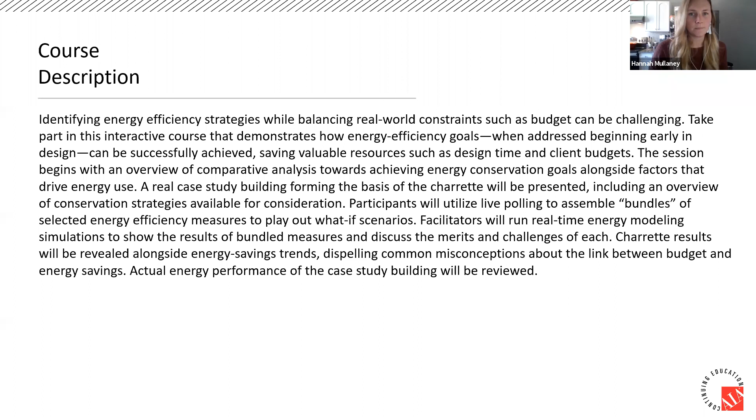So in this course, just to outline some of our learning objectives, we're hoping that you'll be able to recognize the value of early energy analysis in the design process, and help you identify a range of energy efficiency options and their impacts on energy outcomes. Also interpreting building performance and financial information provided by the energy analysis results. And we also hope that you understand how decisions made early in design can increase your energy savings opportunities.

So just to outline the agenda and what to expect: we'll set the stage for the charrette that we'll be interacting with later. This is a live participation charrette. Then we'll discuss the results of that charrette and evaluate the energy model and look at the trend data. And then we'll review the built project, the actual project that was built based off the charrette that we are using today.

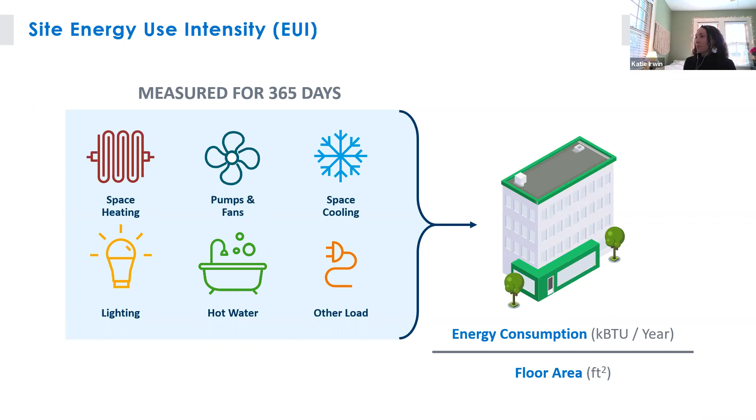Okay, so how does EUI work? Well, as you can see here, we take all energy needs in a project such as the heating, the cooling, the lighting, basically anything that's going to make your meter spin. And we divide that energy consumption by the square footage of the building. And by doing so, this normalizes the value independent of the size of a project. So we can compare the efficiency of a smaller building to that of a larger building on a per square foot basis. And that resulting number will give you the EUI.

Well, looking here, we have the site EUI and source EUI. So you might be familiar with the difference between the two. The site EUI looks specifically at on-site energy consumption, whereas the source EUI also takes into account the inefficiencies in generation and transmission. But for today, we're going to keep it simple, and we're just going to look on the on-site EUI.

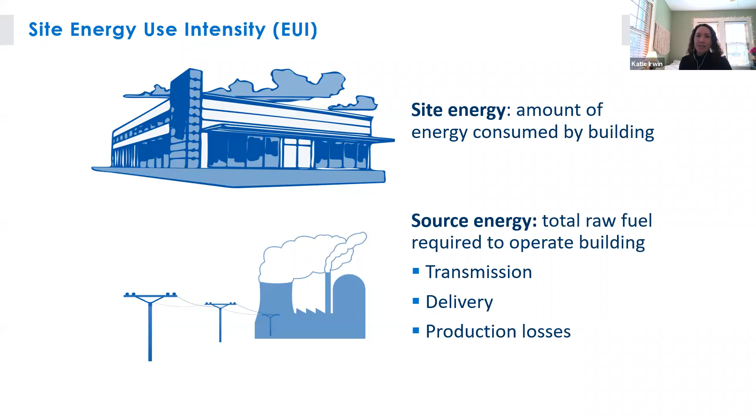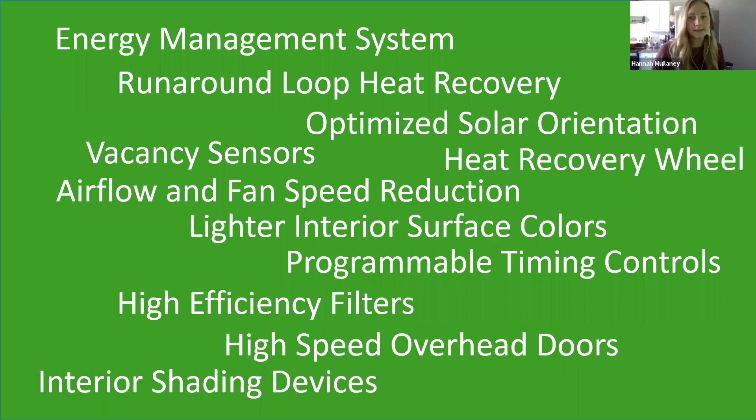So where do we start with our energy efficiency strategies? So far, we've talked about energy in the big picture on the grid and at the site. Now let's move into building and talking about efficiency. As an example, here are a few strategies you might consider. And here are some more, and some more, and more. And pretty soon you're overwhelmed and you don't know where to start. So how can you cut through it all?

Well, we recommend setting your goal for your project first. Are you trying to reduce your cost for your client? Or maybe you have a LEED goal or trying to get to net zero energy. Each one of these goals can send you down a very different path with your design. And the first step is to know what you are setting out to do.

So once you're there, how do you choose strategies? I can tell from experience and practice that often teams will depend on rules of thumb or maybe rely on manufacturer's literature. Maybe we compare to similar buildings, or you can guess where this is going. We can leverage energy models to do the work for us.

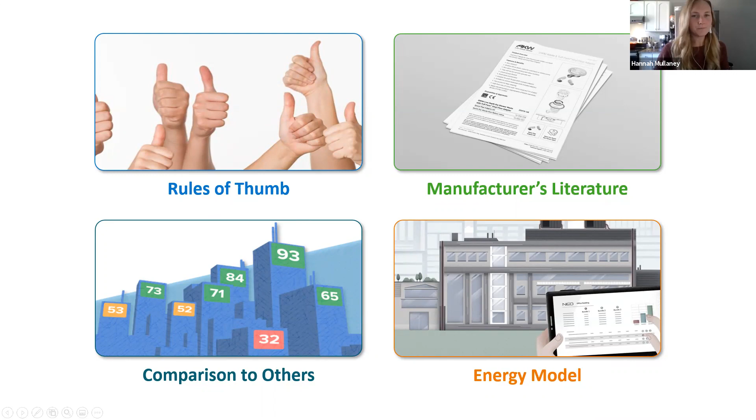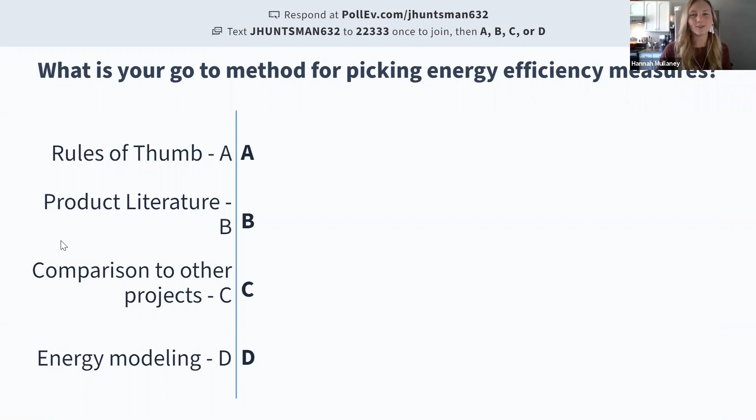Sorry, I forgot to clear out previous responses, but this next question: so what is your go-to method for picking energy efficiency measures? Don't let us bias you.

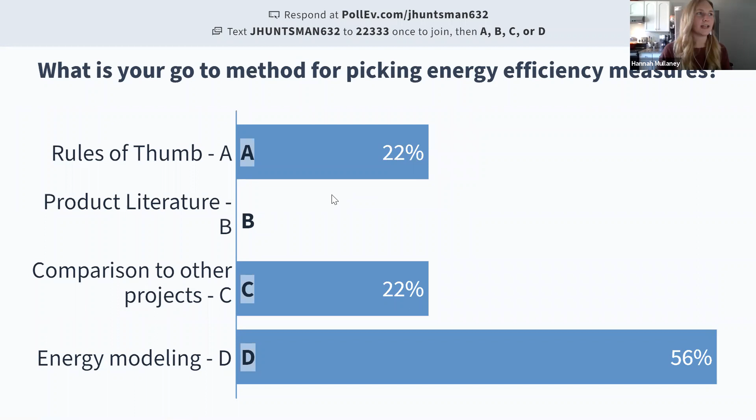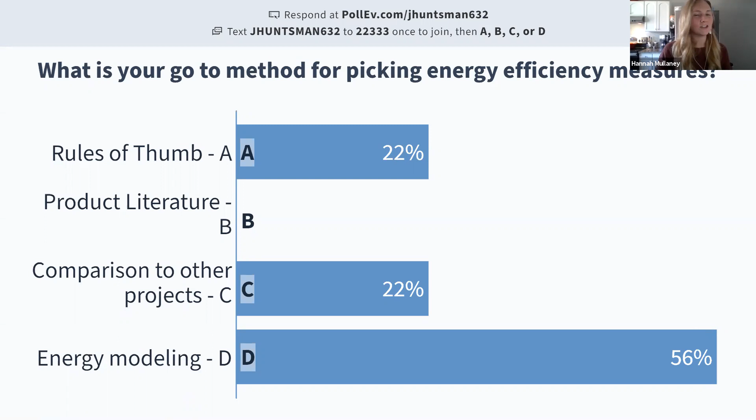Great. Yeah, so we see a lot of different strategies out there and not necessarily picking on any of them, but we definitely lean towards more of that energy modeling strategy, just so you can get that whole building energy analysis.

And Katie, back to you. Great, thank you. And thanks everyone.

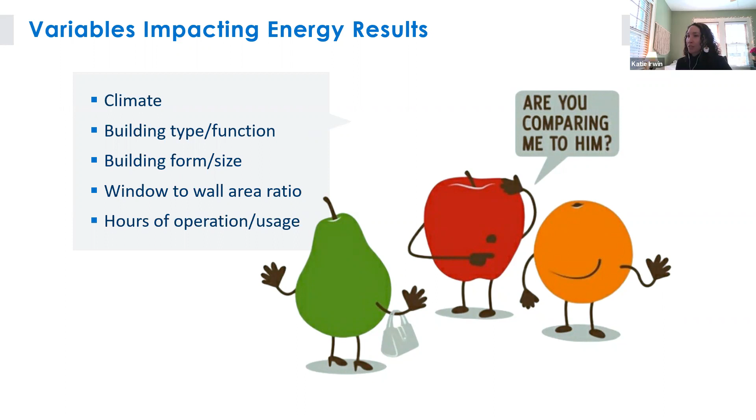And as we evaluate your energy model, what we're looking at are those optimal groups of strategies that will give you an idea of the potential for your project. So unless cost is no object, you're probably not trying to get the most efficient building out there. We understand that you're trying to align those first costs, the energy cost savings, along with your design goals.

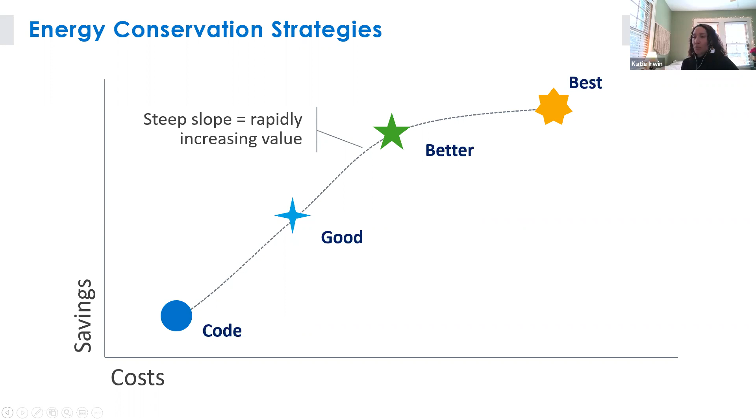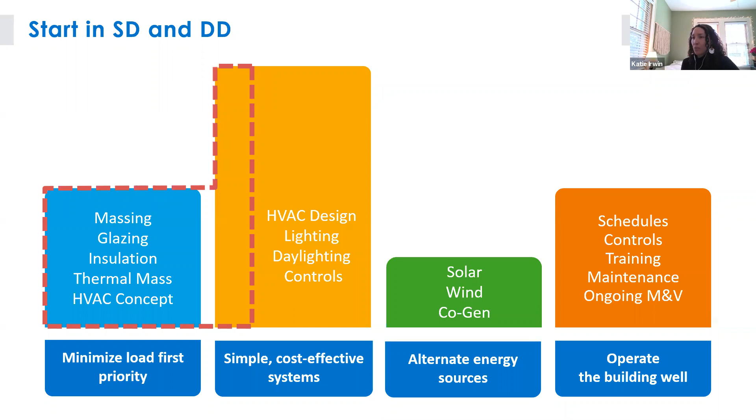And so by starting early, you'll have the greatest opportunity to maximize your savings when you're starting in schematic design and design development. First, by minimizing the energy load through efficient massing, judicious use of glazing, followed by implementing simple cost-effective systems such as the HVAC design, the lighting, daylighting controls. So applying these measures will minimize your base load and will have less impact to the grid. And of course, it's important to remember that at the end of the day, people will operate the building in ways we can't always predict.

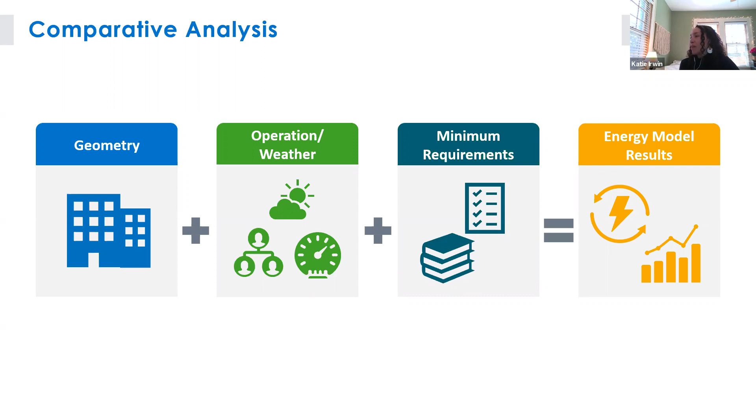But with everything that goes into these models, it's important to remember that combining the effects of energy efficiency strategies isn't additive. It's not straight addition. So 2 + 2 doesn't always equal 4. It sometimes equals 3.25 or 3.1. And that's because we have a whole building and systems approach. We're taking into account how these strategies interact with each other.

So let's get back to that long list of energy efficiency measures. With some energy modeling tools, it's possible to study every one of them, but in the interest of time today, we're just going to narrow the list down to 6 categories and see which might be the best for a sample project. So we're going to be looking at building massing, envelope upgrades, lighting controls, HVAC systems, demand controls, and energy recovery.

A little bit about the project that we will be discussing today and using for this exercise. This is based on an actual project that came through our office. It's an elementary school with typical programming, typical uses, and typical hours of operation. The project is located in the heart of the Midwest in a climate zone 5A.

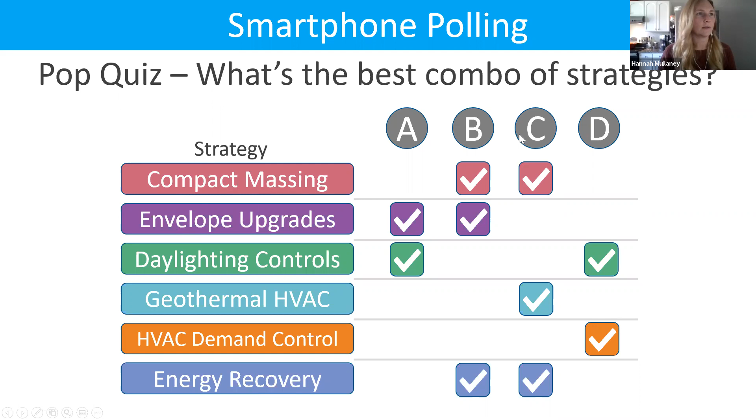All right, so now we're gonna jump into a little bit more detail, and we'll ask you the same question again with a little bit more knowledge, so you can reevaluate your answer if you want to, or stick with the same one. So think back to those 6 energy efficiency conservation measures we talked about a few minutes ago. Right now, we're going to go through each one of those strategies, review the options you'll have on the table, and we'll talk about some of the energy data you'll use to inform your decisions. Then we'll let you discuss and select which option you'd like to use in each category.

So the first option on the table is the building massing. On the left is the dispersed form. It's a floor plan that's focused on views, daylight access, and visual interest. The alternate on the right is the more compact form. And the user experience aside, moving in this direction could have some potential for energy savings.

And so when we move through this charrette, you'll see that there are dollar signs at the bottom. We'll give you a budget of $12. And so these correlate with the different strategies that you select. So in this case, for the building massing, the compact form is the less expensive, and the dispersed form is more expensive.

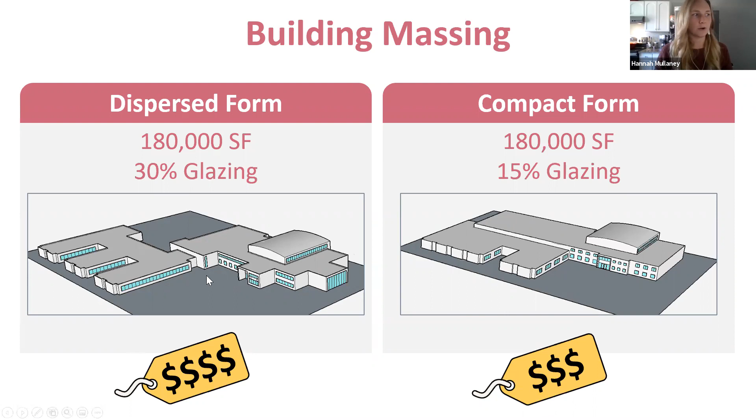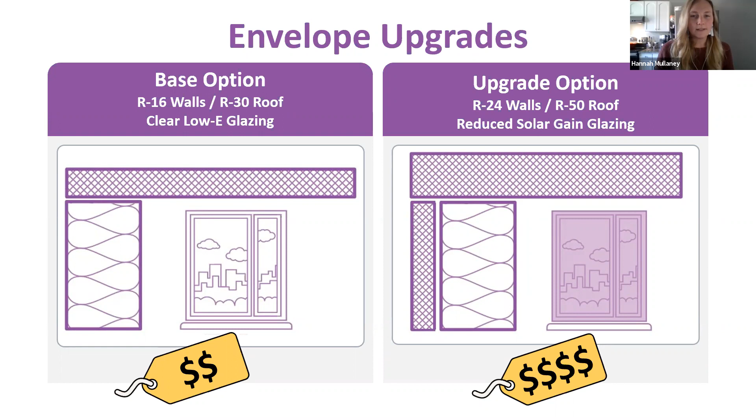Another decision we'll be looking at is the makeup of the envelope. We are using fairly basic insulation and glass on the left, or we're upgrading on the right. And so again, you can see that the upgraded option correlates with a higher price tag. And then for the lighting controls, you can choose to have the occupancy sensor or vacancy sensor control, or you can go with the daylighting controls.

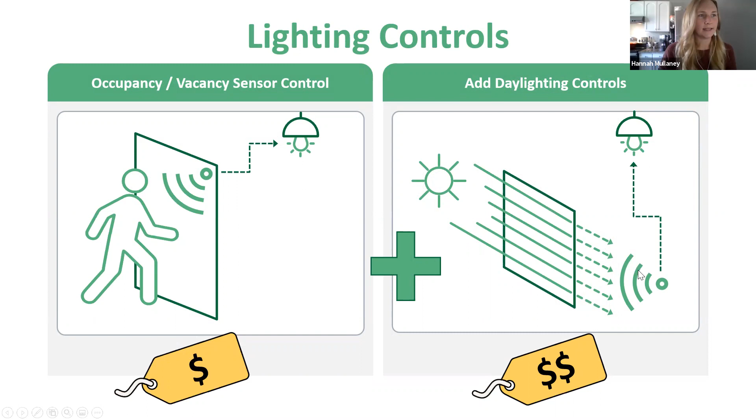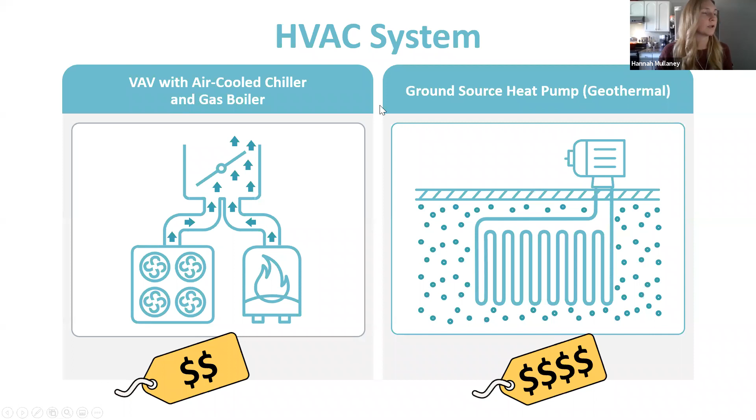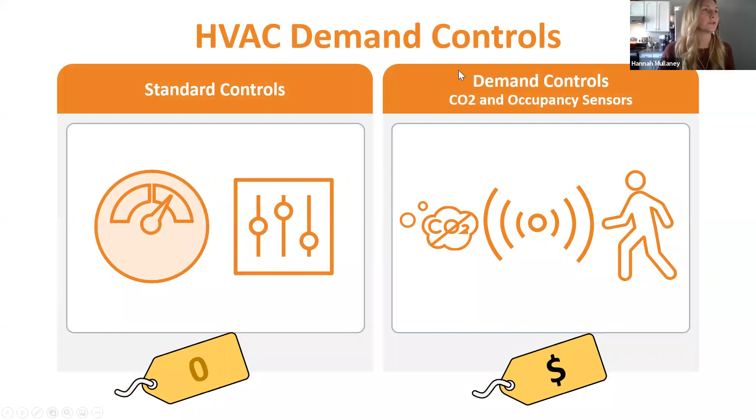And then with the HVAC, you can go with VAV with air-cooled chiller and gas boiler, or you can go with the geothermal option. And for the HVAC demand controls, you can go with standard controls or demand controls with CO2 and occupancy sensors. And last but not least is energy recovery. So you can go with no heat recovery or total heat recovery.

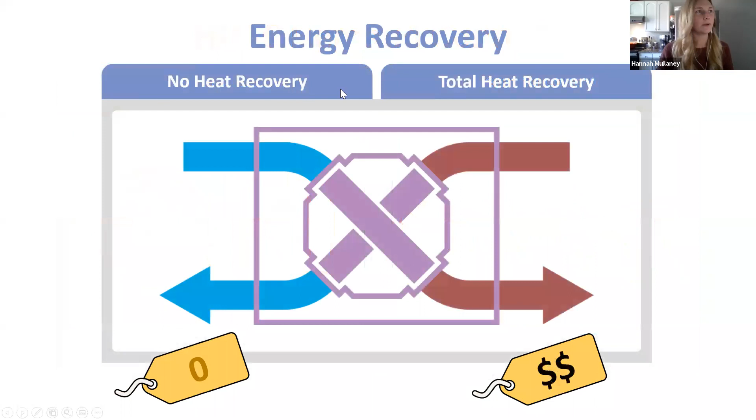So now, given the savings range and a little bit more breakdown of those different strategies, you can go ahead and pick your selection again, A, B, C, or D. I'll give you guys a second on this slide to look at it.

All right, great. So we will go over these strategies and pick the best. So B and C were our top two choices. So we'll start with B since that had the highest amount of votes. And Katie, would you mind letting me know which ones from B we should select? Yeah, sure. So for B, we had the compact massing, the envelope upgrade, basic daylighting. They went the VAV, basic demand controls, and energy recovery was selected.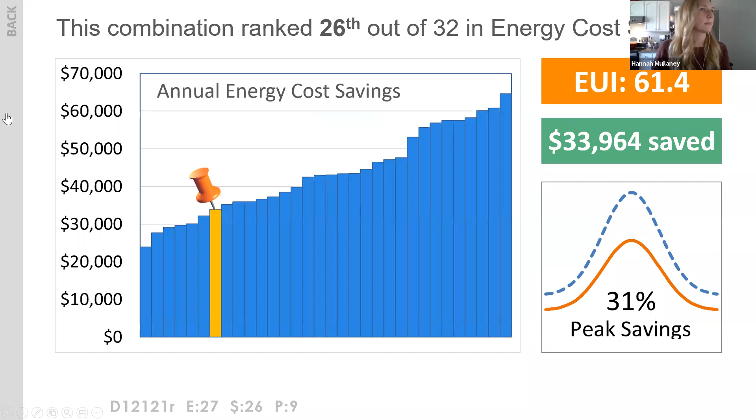So now we'll look at all the different strategy combinations and some trends on how specific strategies played into the overall results. This graph shows every possible outcome in this exercise, each bar here represents the savings results from one combination of strategies. So here you can see with the dispersed building form combinations, you could really have a wide variety of savings potential. This all, again, just kind of refers back to what Katie was saying about how everything 2 plus 2 doesn't always equal 4. So how the systems interact with each other in the dispersed building form can make a big difference in terms of your savings.

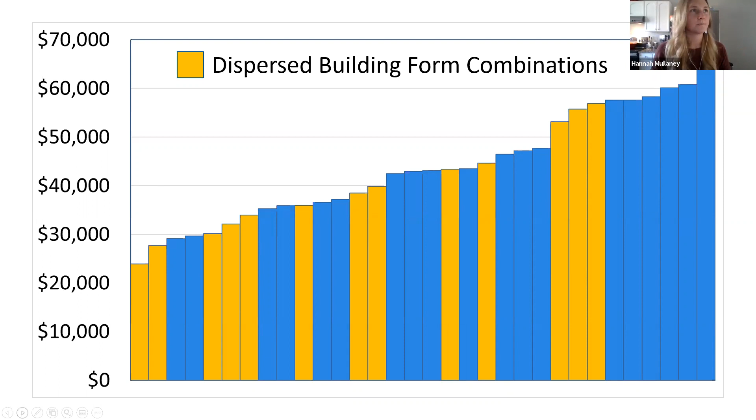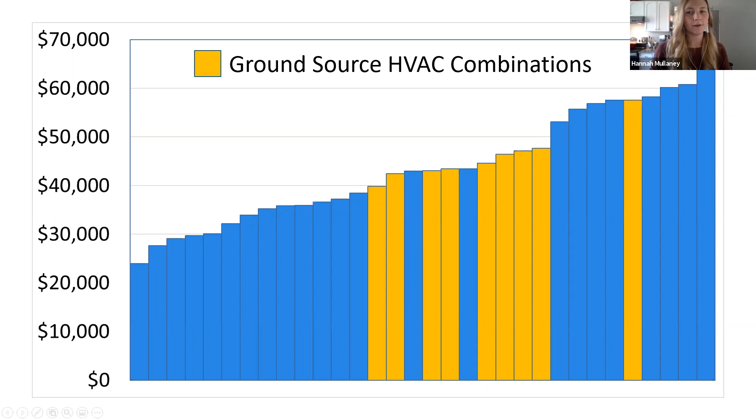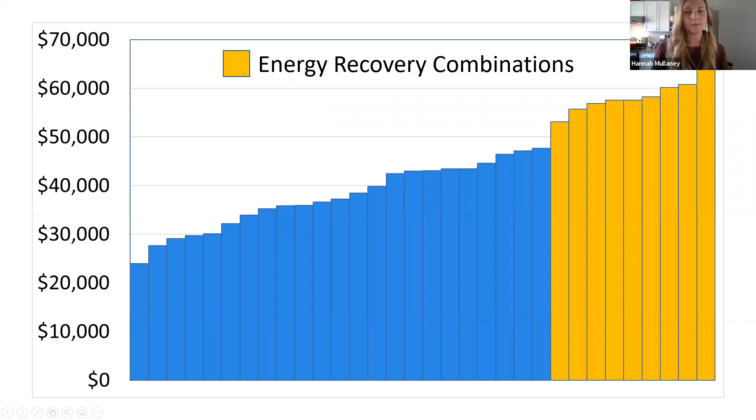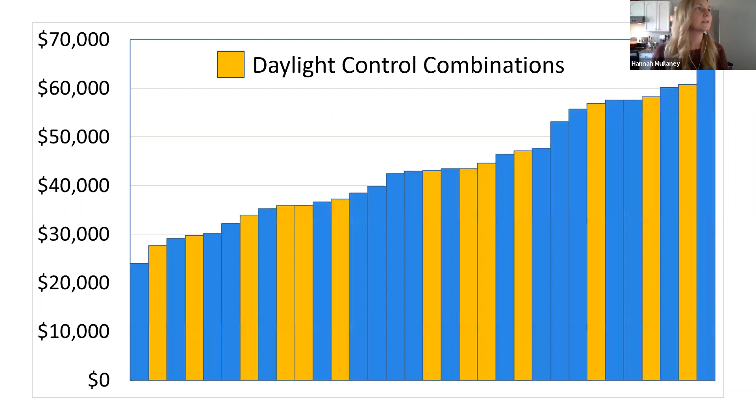All right, well, thanks, Hannah.

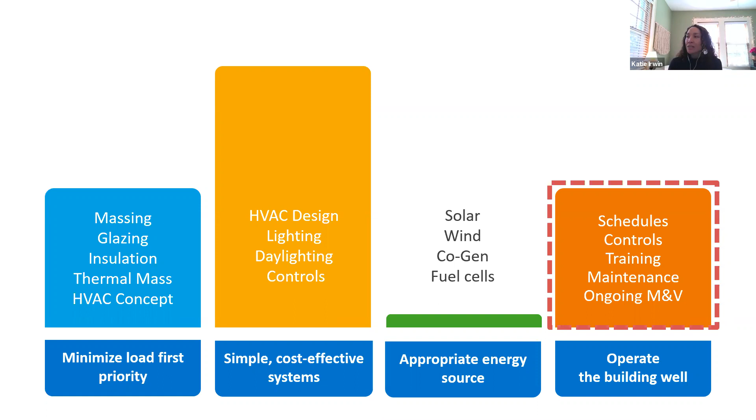So we'll dive a little deeper as to how the project results shook out in the end. And as Hannah gave a preview of what they did, but we'll just give a little more detail. As we mentioned earlier, the optimal time to maximize on those savings would be during the schematic design and design development phases. Again, first taking those steps to minimize the load, and then followed by implementing simple, cost-effective systems. And of course, by the time a building becomes occupied, it's key to remember that people will run buildings in ways that we probably never imagined during design.

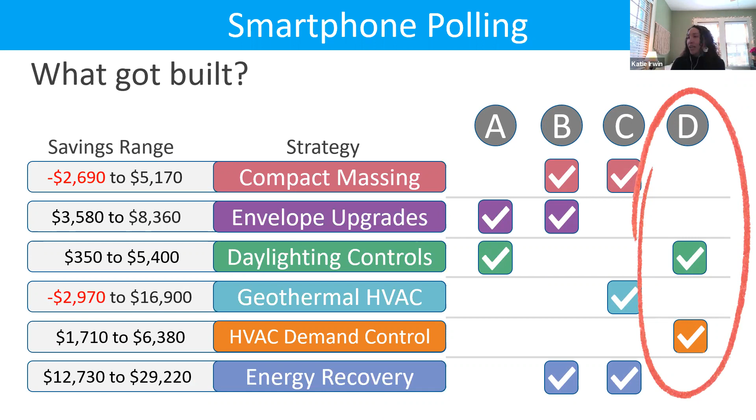Referring back to our smartphone polling, the project team went with option D, and they basically focused on those daylighting controls and HVAC demand controls. With this next slide here, they went with that dispersed form, the basic envelope strategy, selecting the daylighting controls and demand controls. They did not go with the energy recovery, simply due to maintenance being an issue for them specifically.

They went with the VAV system initially, and then we checked back in with them later on after the project was built, and they decided to swap out and go with the geothermal heat pump system. So that's going to show that it basically takes some time and practice for folks to get used to learning different systems.

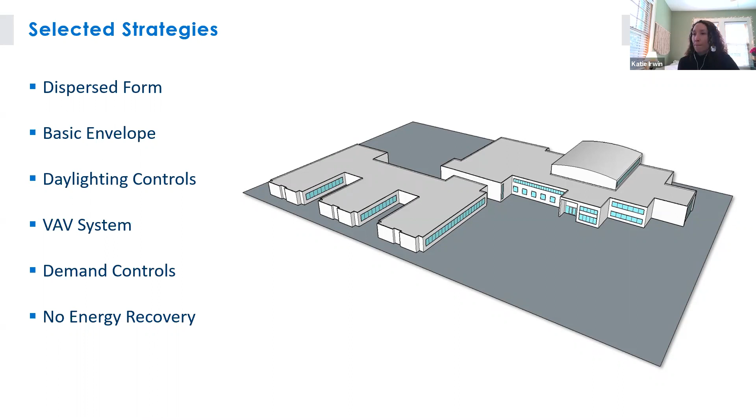They were able to earn some savings with that switch. Looking back here, before they went with the geothermal switch, this chart is showing their original energy cost savings with that VAV system. As Hannah pointed out, there is still room for improvement in terms of energy cost savings in that EUI, as we learned through our exercise earlier today.

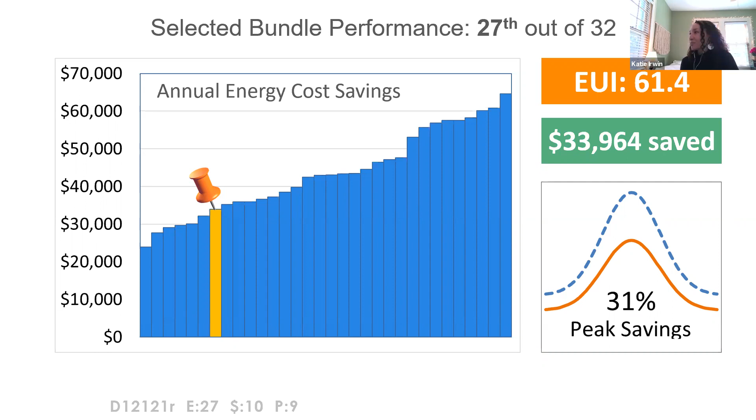So we were scratching our heads, why was the actual energy use higher in this case? And we learned there were a couple of reasons. One of them was that we had originally anticipated the hours of operation to be a lot less during the summer months, since school is out and their summer programming wasn't that all too intense.

But it turns out the community really liked having a new building and scheduled more events during those summer months. So that wound up increasing the energy use.

Another factor that increased that energy use during the school year was that they had disabled all daylighting controls. One of the teachers basically found the lights weren't working in their classroom and somehow just decided to turn off all the daylighting controls, and that increased the energy usage. The good news is that after that was realized, the controls were recalibrated and things were up and running again.